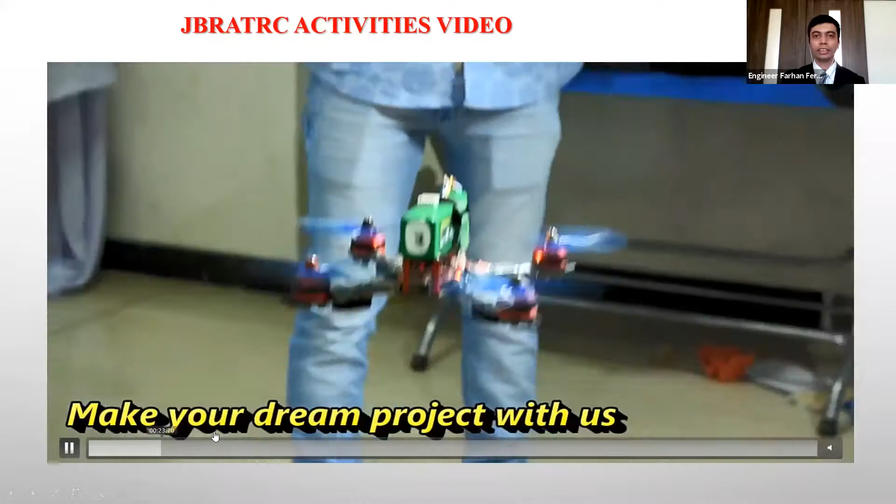So I am showing a video about our organization's activities in Bangladesh and other countries. Last year we organized a drone training session at East West University, Dhaka, Bangladesh. Many students joined, and our trainer trained them. International media, Voice of America, also covered our news, and Bangla newspapers and television media also telecast our workshop and seminar on robotics and other advanced technology.

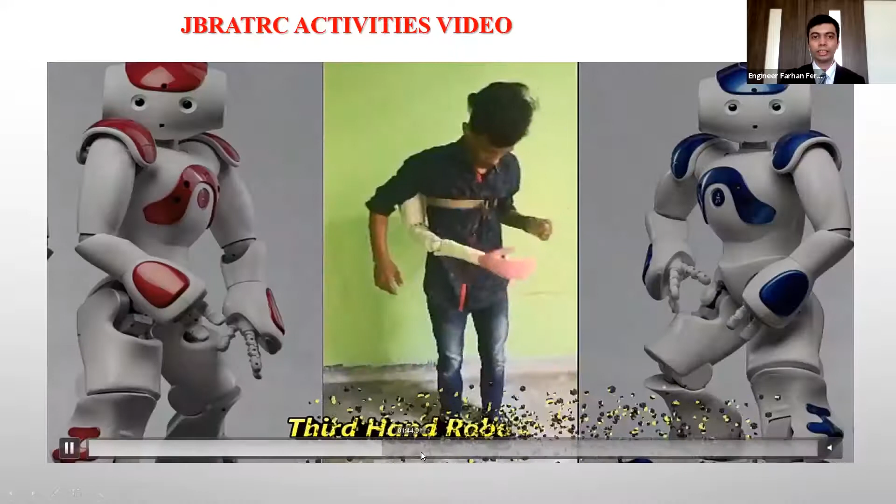Our team members made this robotic hand, which can do work that is difficult for humans, work in dangerous situations, and handle fire objects. Our team also made this prototype cleaning robot. It can clean our home, and it is very important nowadays because the coronavirus is everywhere, so we must keep our home, office and other places clean.

Our team is also doing research on drones: how we can use drones in disaster areas like floods or fires. If any student, professor or anyone wants to join our organization, they can contact us on our website www.jbratrc.com. We also joined some international conferences in Bangladesh.

This one is Bangladesh ICCIT, and our member made this robot, the Bongo robot. This robot can talk with you and answer any type of question. This is the smart window with an IoT system, so it can automatically open and close with the weather. We published this in IEEE and joined an international conference in the USA last year. This machine is an automatic bottle deposit system: if you give a bottle, it returns some money. It is a very environmentally friendly machine.

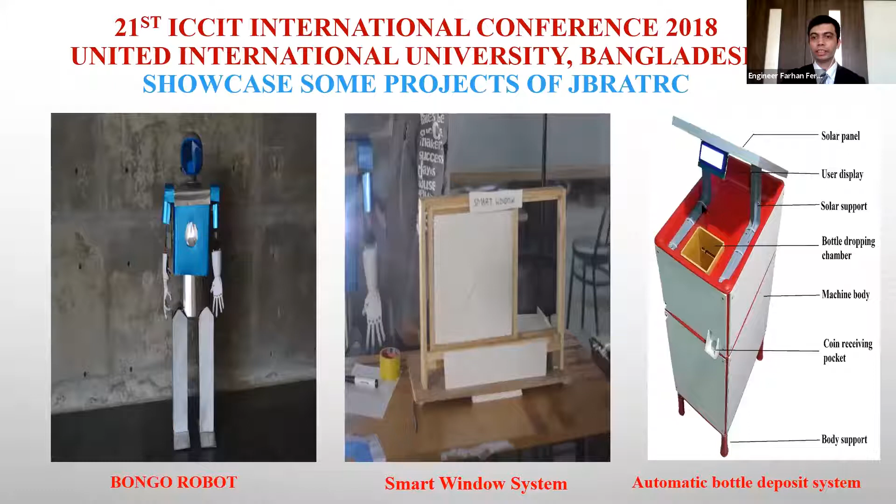We are doing other projects like the firefighting robot, which can protect against fire, and also a smart lock system. We don't need any key; we can use our mobile phone or a remote to open the lock.

And also, as I already told, we are doing some research on drones on the agriculture side, and also the firefighting drone. We are doing research on how we can use it and how we can apply it in the real world.

And last year, our team members and I joined an international conference in the USA, at Eastern Washington University. And I presented a paper on the passive dynamic biped robot, the humanoid robot, with mathematical and simulation results. And our team showed a poster about the Bongo robot.

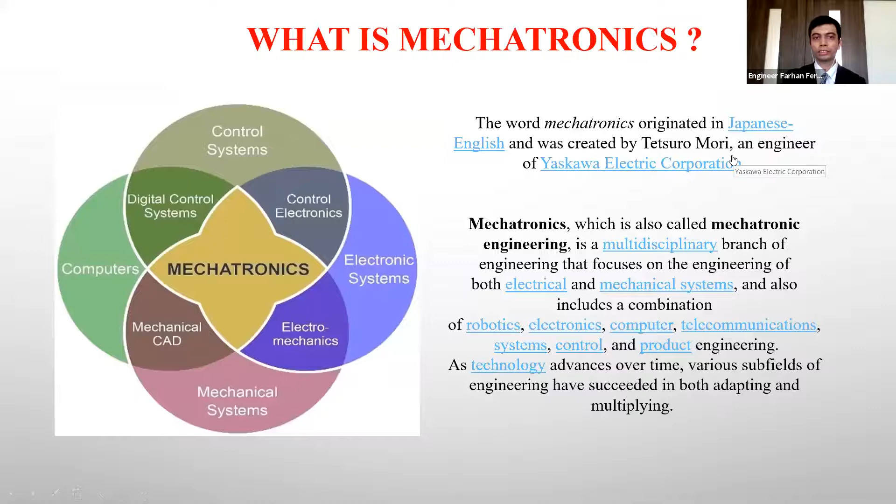Then what is a robot? As I already told, a robot is not one thing. It needs a combination of things. Information science, computer science, mechanical, electrical, electronics, every engineering is needed to make a robot. If you want to design, you need design and construction. And if you want to give artificial intelligence to robots, you must know about software. So there are many areas of application and research in robotics.

There are military purposes; nowadays Boston Dynamics in the USA is trying to make military robots they are testing. And there are industrial robots in Japan. I am working a job with industrial robotics machines, so every day I stay 10 to 12 hours working with this robot.

And agriculture robots; I already told my team also made an agriculture robot. This robot can help agriculture; it can give water to the field and other types of help. Also medical robots, because nowadays coronavirus is a dangerous situation in the world, so medical robots are very important.

This robot can help move medicine from one place to another, and also move your food from one place to another, so people are not infected. Many people can avoid infection, because nowadays if you are very close and mix nearby, it is dangerous for coronavirus. So medical robots are very important.

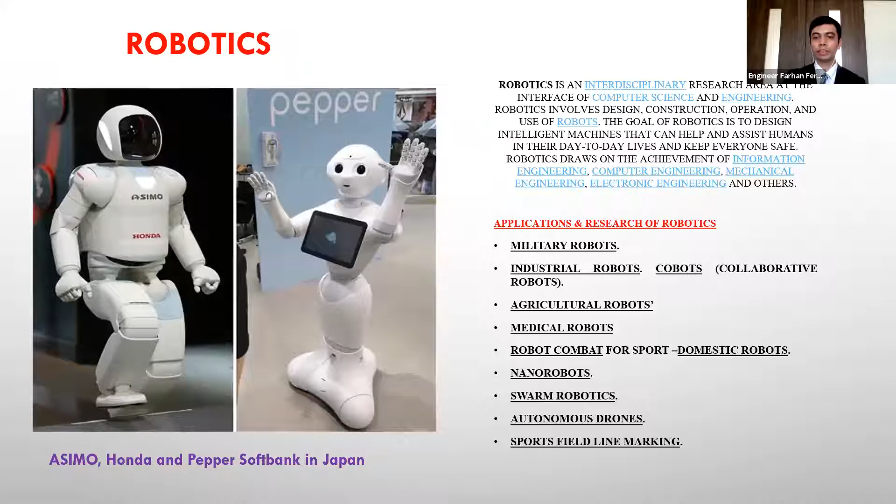So this type of robot can assemble the car. In Japan, there is Panasonic, Toyota, Honda, big companies. They are using the welding robot or assembly robot, and this robot can assemble the car. It is very time effective, and the robot can smoothly do this work, because if you use a human, the human cannot do the work very smoothly, but the robot can do it smoothly, and it takes the lowest time.

So there are some material handling robots, also industrial robots. Some robots can do inspection. If you have any type of defect, then this robot can find it and solve it, improving the productivity. I already told you, if you apply the robot, then it takes less time, and it gives high productivity.

We can do high quality material, because in Japan they use robots, and they get high quality products. Their products are not cheap, they are very expensive, because they use robots in their industry for high-end products.

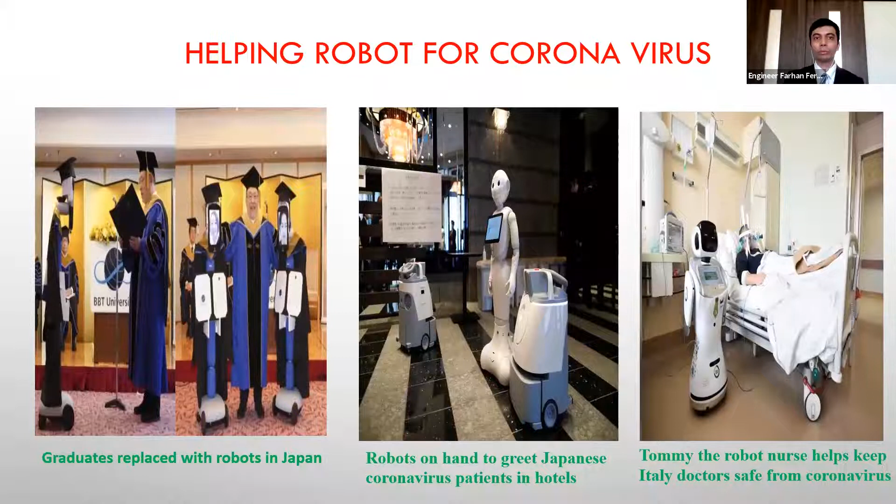And there are some robotics fundamental components. Without knowledge about these components, we cannot know how to make a robot, and how we can research about it.

We must know about actuators, because every robot has an actuator, like servo motors, stepper motors, hydraulic cylinders, and pneumatic cylinders. There's also knowledge about sensors, because we must use sensors in the robot. There are many types of sensors to communicate with the robot internally, such as ultrasonic sensors, some force sensors, touch sensors, and temperature sensors. We can use these in the robot.

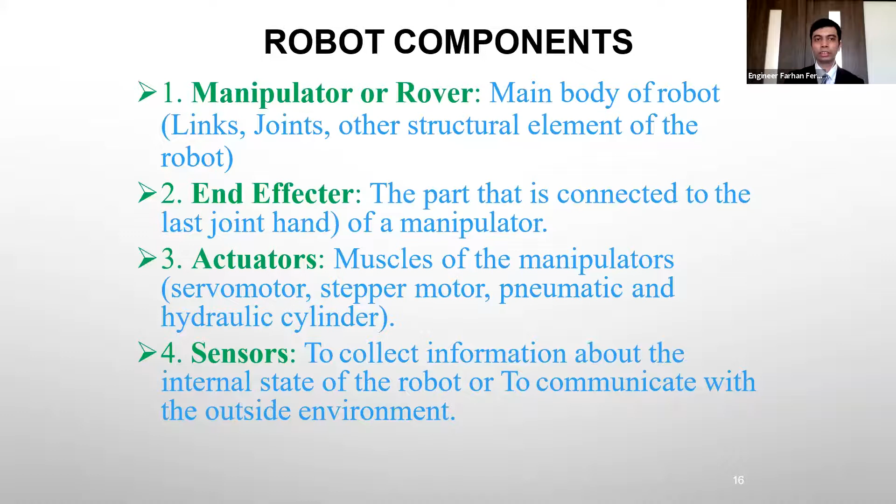There is also need to learn about the controller. We must learn how we can control the robot, how we can control the actuator, and how we can control the robotic leg or other types of robots.

The processor is one type of brain of the robot, because without the processor, the robot cannot calculate the motion, the velocity, and how much distance it can cover. So the processor is very important for a robot, because it is the brain of the robot.

The last one is software. We must learn about software, because without software we cannot do programming for a robot. There are many programming languages in the world, but the fundamental ones are Python, Java, Ruby, C, and C++. We need to learn this type of programming and how to apply it in robotics. We can see examples on Google or YouTube or other places, and then we can learn about it.

Artificial intelligence, AI, is very important for a robot. Without artificial intelligence, if you tell a robot 'please bring me tea,' but the robot doesn't understand, it cannot bring tea or coffee for you. If you tell it to bring medicine or food, but the robot cannot understand, then it cannot bring it for you. So if you program it with artificial intelligence, the robot can understand.

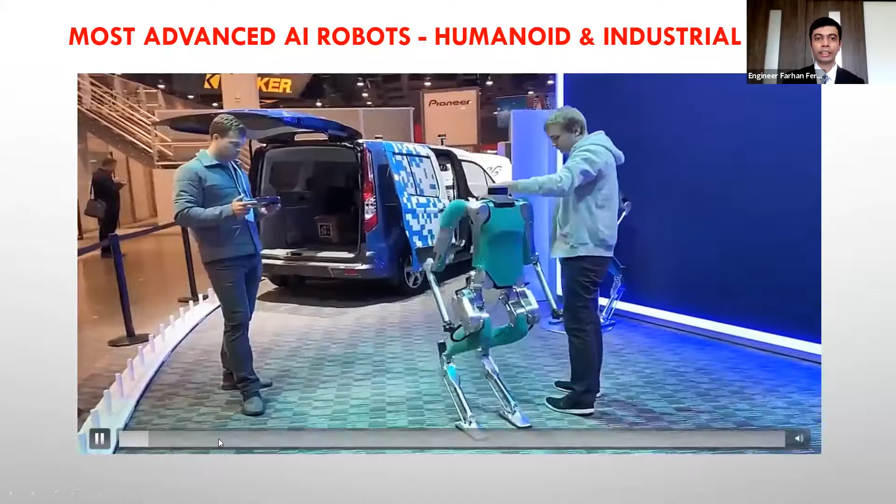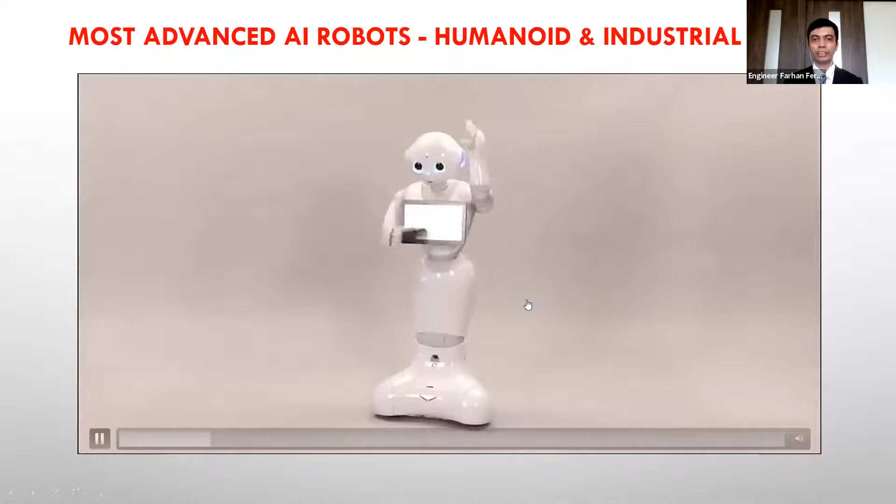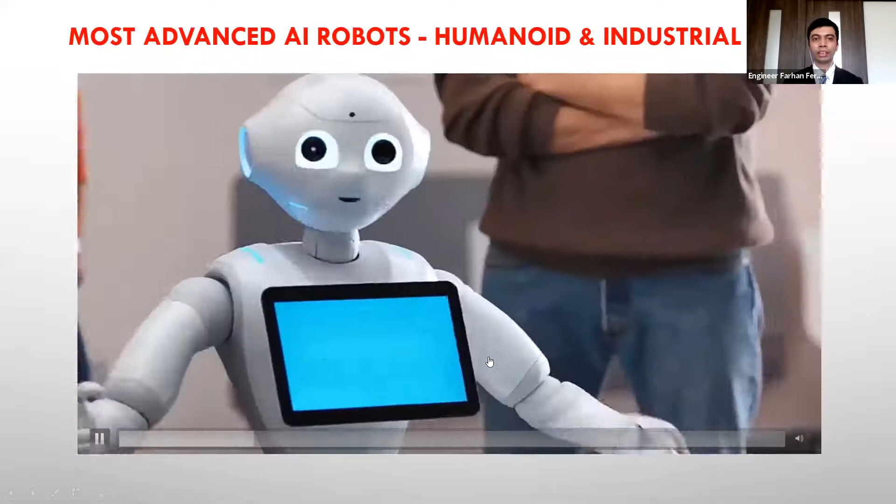This robot can dance and also give you directions in this coronavirus situation, showing where you can go and where a shop is located. Some robots can give you ice cream, and this type in Munich, Germany, they showed the Japanese robot, which already sold about 10,000 units.

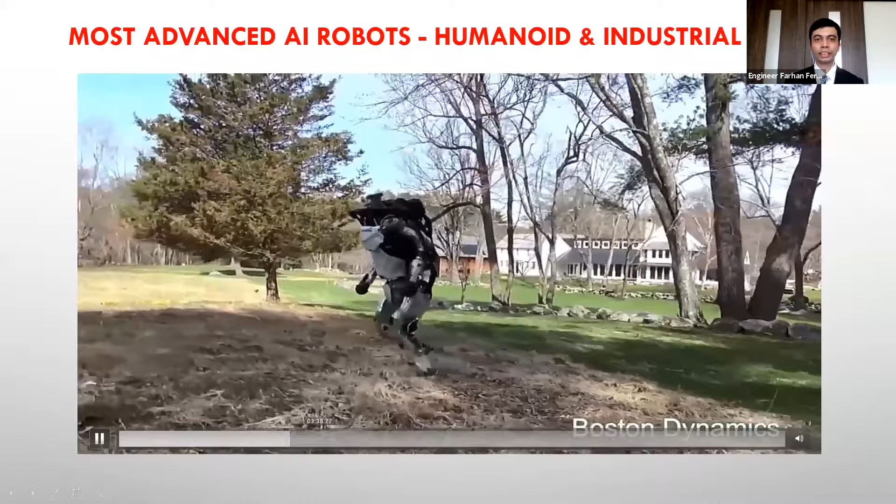And this robot can give you entertainment. This one is the Boston Dynamics USA robot, and this robot can be used for military purposes. They are testing this robot. It is very intelligent and very strong.

This robot is also a Boston Dynamics robot in the USA. They use cameras in the front of the robot, and the robot can go from one place to another without human help.

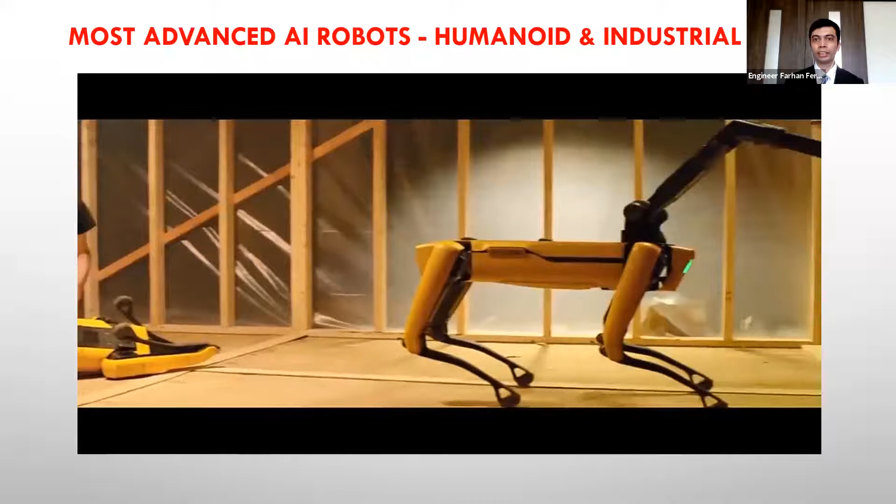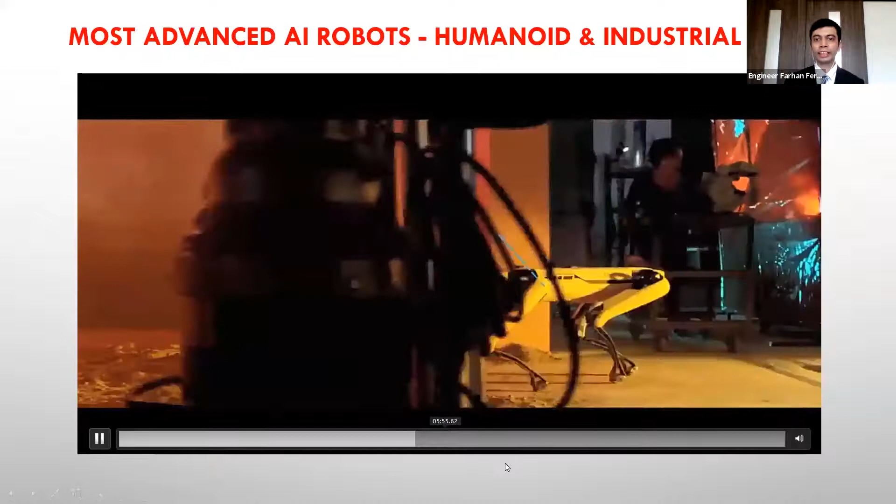Some robots can do dangerous work like drilling, grinding, or nailing, this type of mechanical work done by this robot.

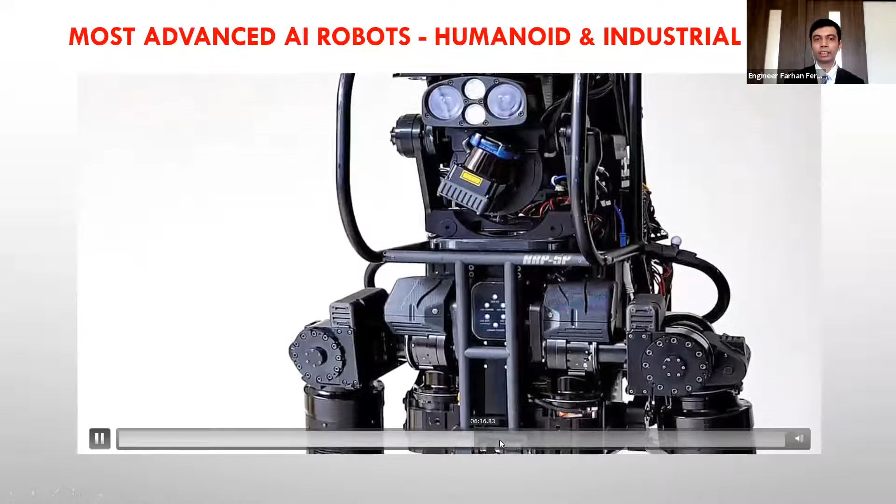This one also made by Japan. And this one, also the eyes, this is also in Japan, or some Korean robot here.

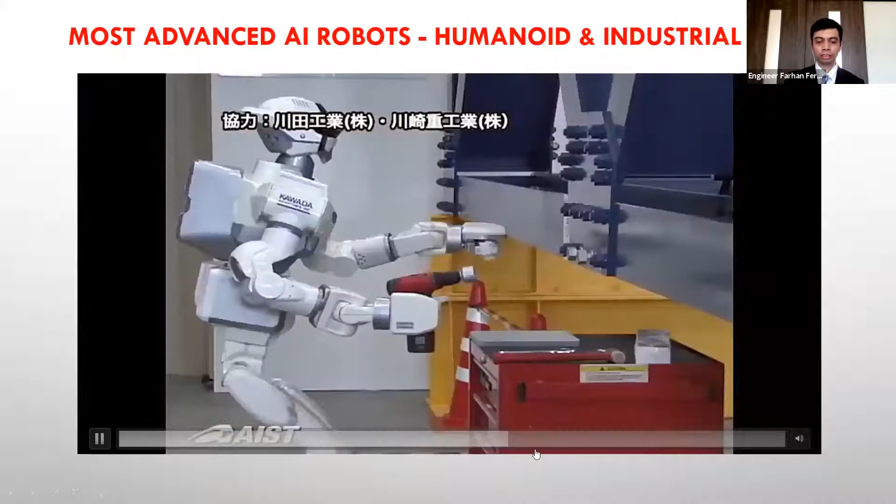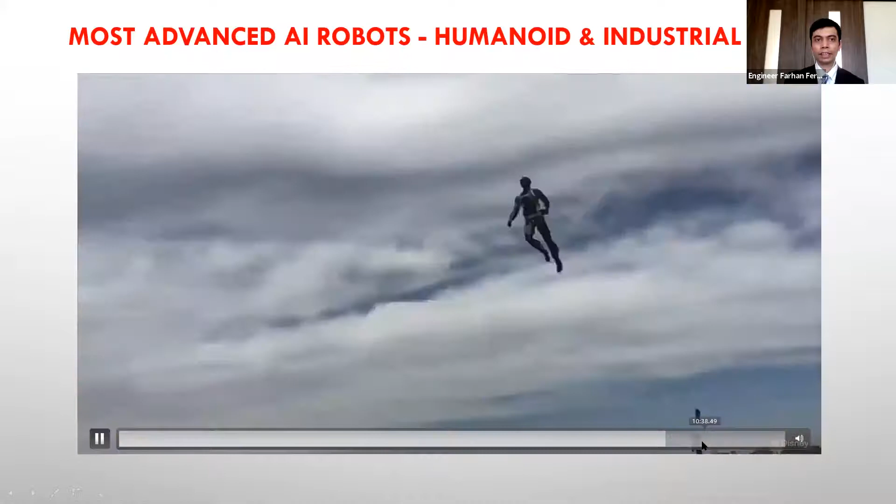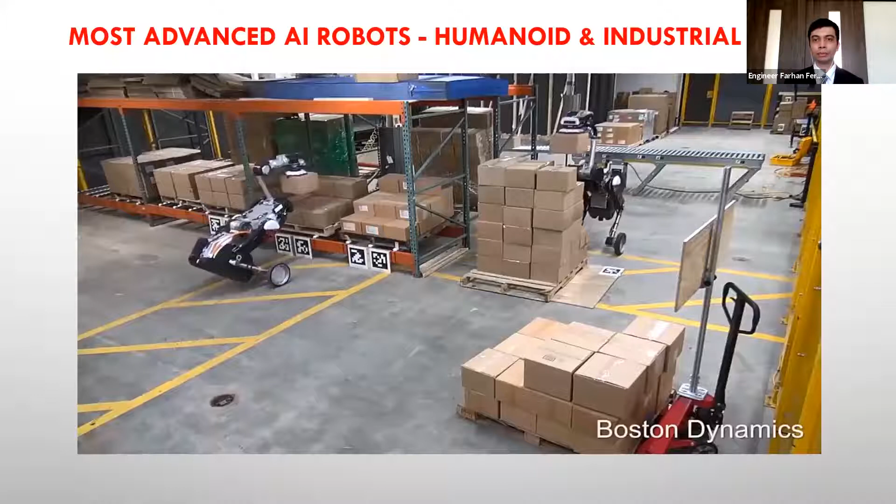This robot helps move things from one place to another, and this type of robot is used nowadays in the Amazon company. This robot can help, and they have wheels on the legs.

This robot can take heavy materials or heavy objects from one place to another very easily. This is also the Boston Dynamics robot in the USA, and they are testing it.

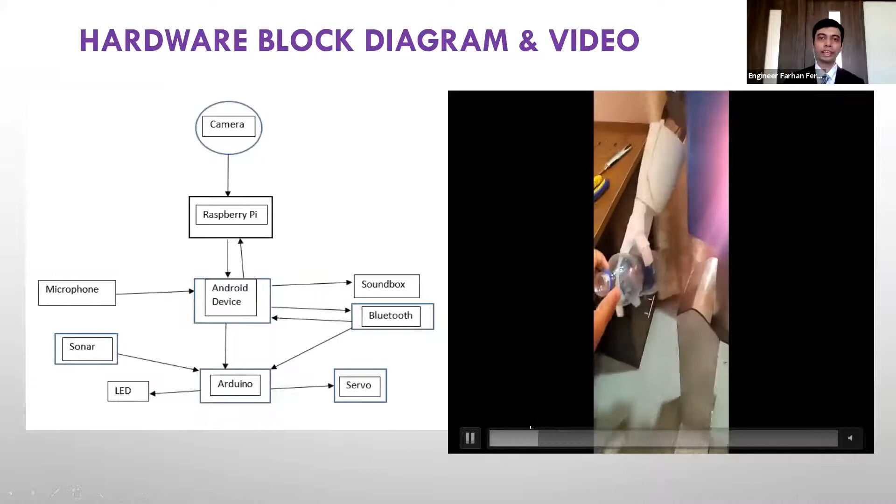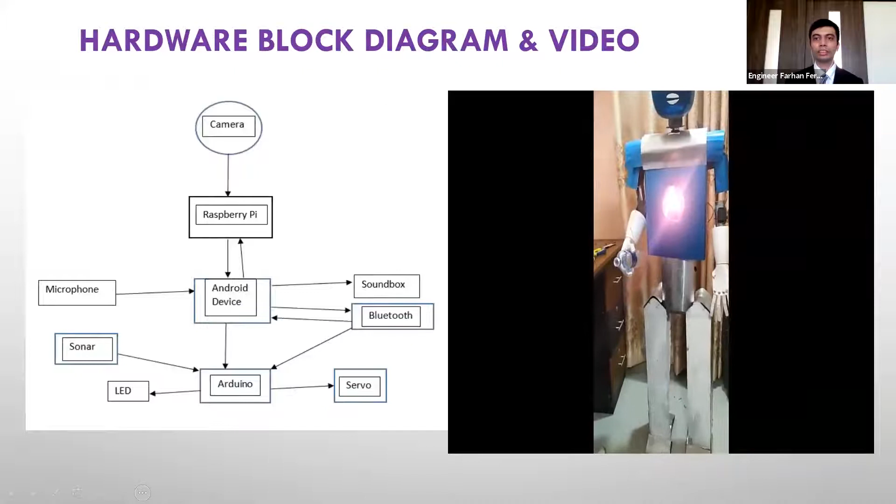There is a video showing this robot. This robot can talk in Bangla, but we are trying to do English. If you ask any type of question or tell it to take the bottle, the robot can take the bottle. If you tell it to hold out the bottle, this robot can hold out the bottle. So this robot can act on your voice direction.

This robot is one kind of artificial intelligence robot, and our team made this robot using a camera, Raspberry Pi, microphone, Android device, sound box, Bluetooth, servo motor, and some light emitting diodes (LEDs).

Our team also made a robot whose name is the education robot. We are using this type of robot for our education purpose, so children can learn from this robot some characters, some ABCs, or some calculations. This robot can do calculations, play with the children, and dance.

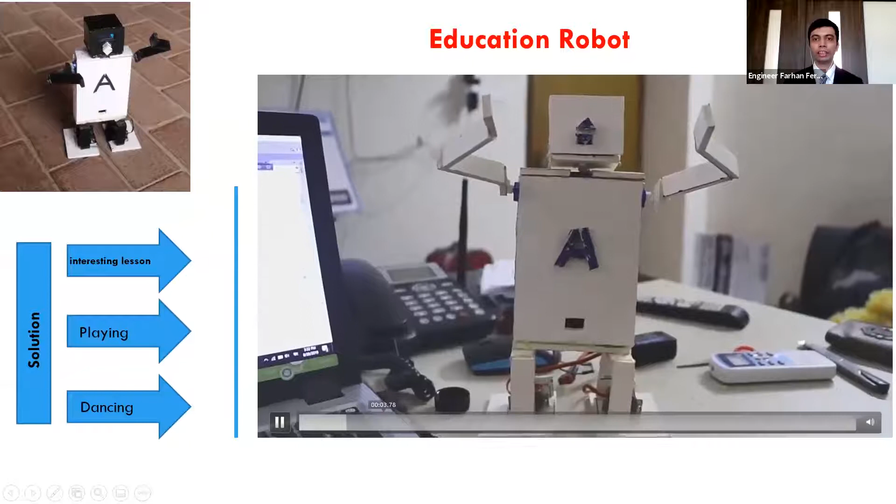Some interesting lessons we are showing in the video. This one is in Bangla now, but we are trying to make it English. So if you tell it some character like ABC or something, the robot can do it.

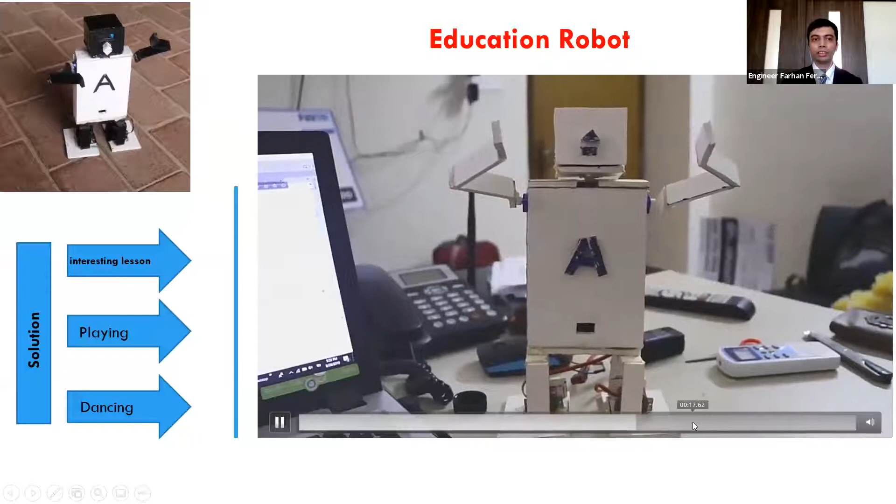If you tell this robot to tell a poem or tell a story, it can talk in the Bangla language now. If you tell it some general calculation, like summation, minus, or plus, this type of robot can do it. It can also dance, sing a song.

They also use Wi-Fi without needing to be online, but this one is an online robot. So it can move its head, move its hand, and the robot can dance if you tell it to.

And now I am telling about a very harsh subject in robotics: robotics dynamics. I have some research in this, from my master's degree in robotics dynamics.

Robotics dynamics is a kind of dynamics. This tells the acceleration, and also tells how we can calculate the robot and how we can simulate the robot. So we must know about mathematics, physics, and dynamics. We must learn about it before we calculate it.

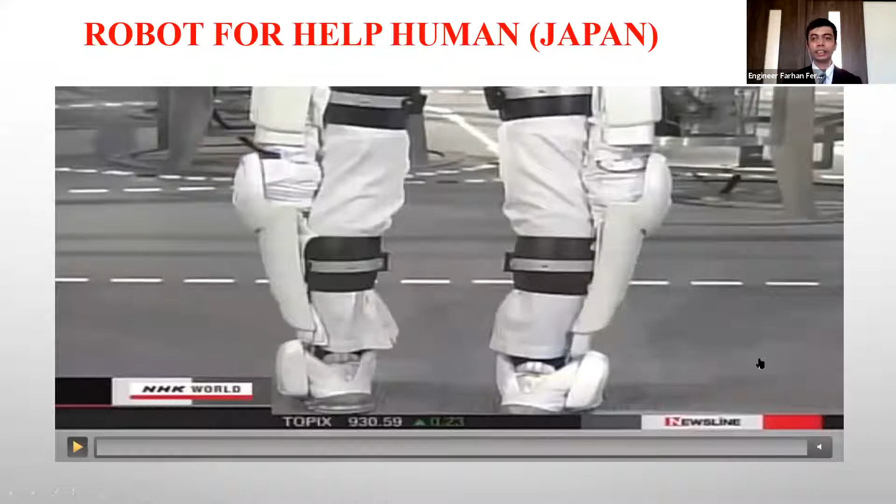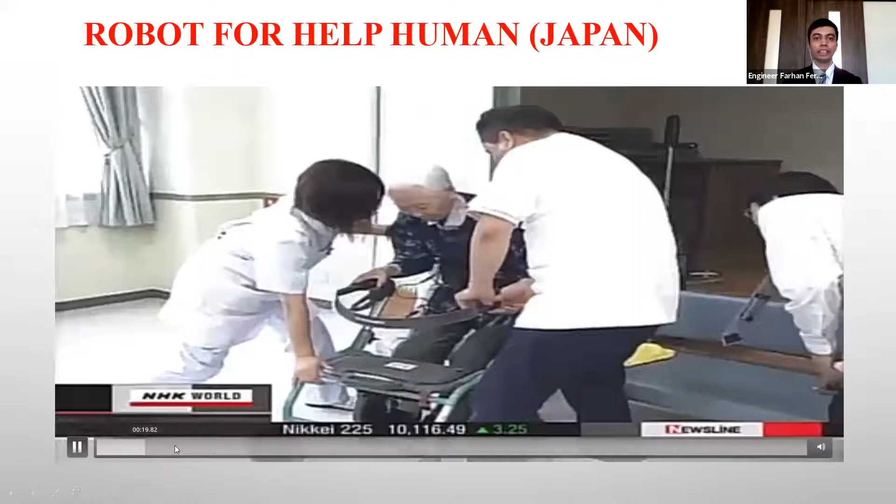Now I am showing a video, because nowadays in Japan there are many old people, so this type of helping robot is very important, a healthcare robot. Because many people here are old, this type of robot can help people move from one place to another without the help of humans.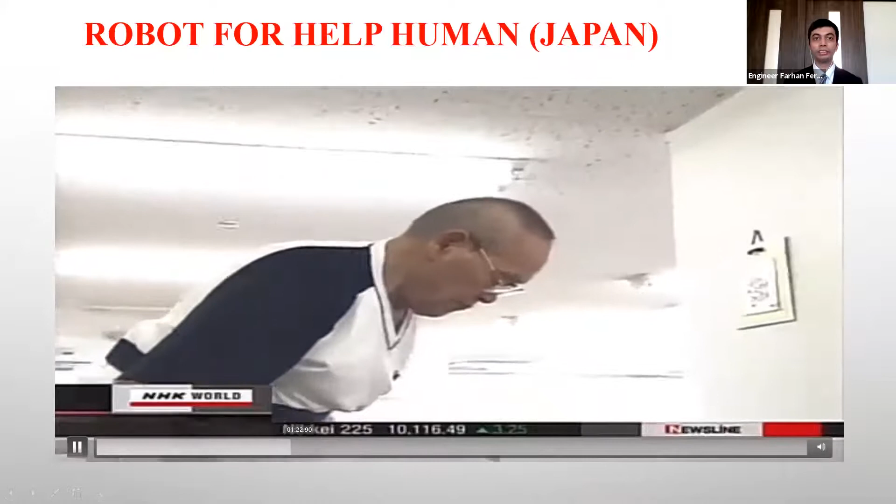Some company made this type of helping robot for old people, so they can go from one place to another without the help of any human, and this robot can help. This is a type of robotic limb, robotic device, or wheelchair robot.

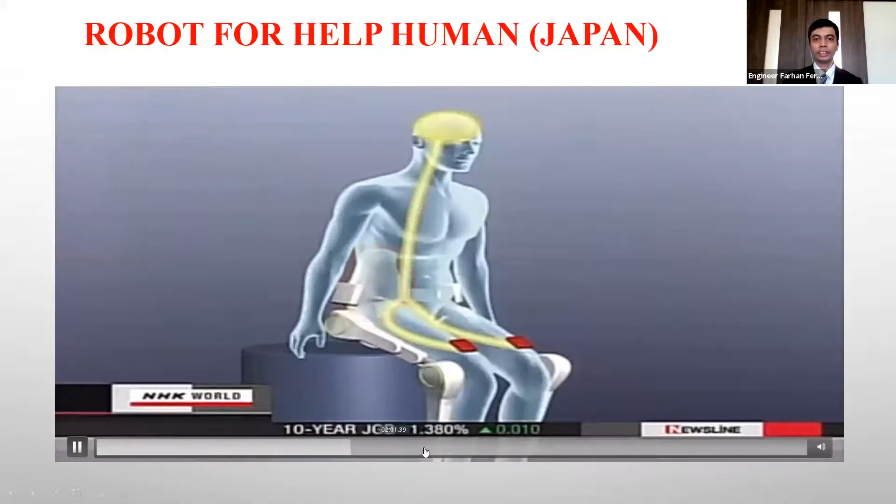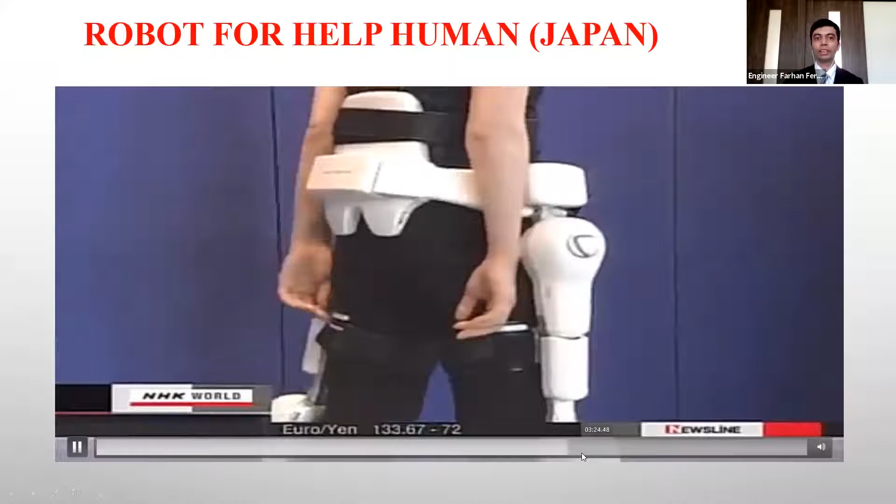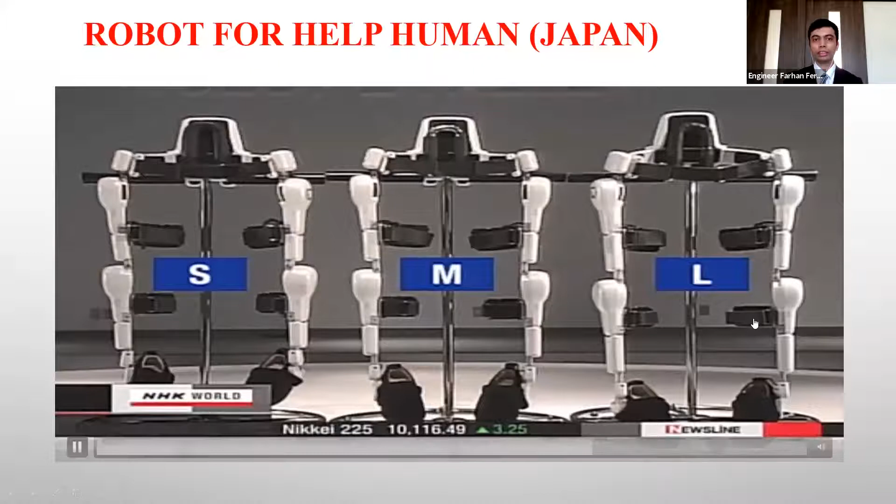They are testing some devices, and Cyberdyne, this company, produces this type of robotics product. This robot can help move from one place to another. Many types of this company Cyberdyne, they made this type of robot.

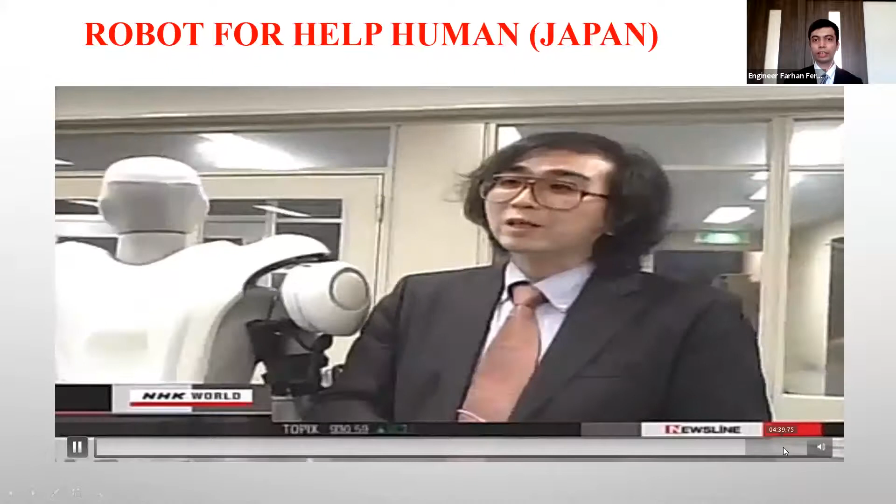So he is the CEO of this company. He made this type of helping robot, this wheelchair or helping robot, to help an old person in the hospital.

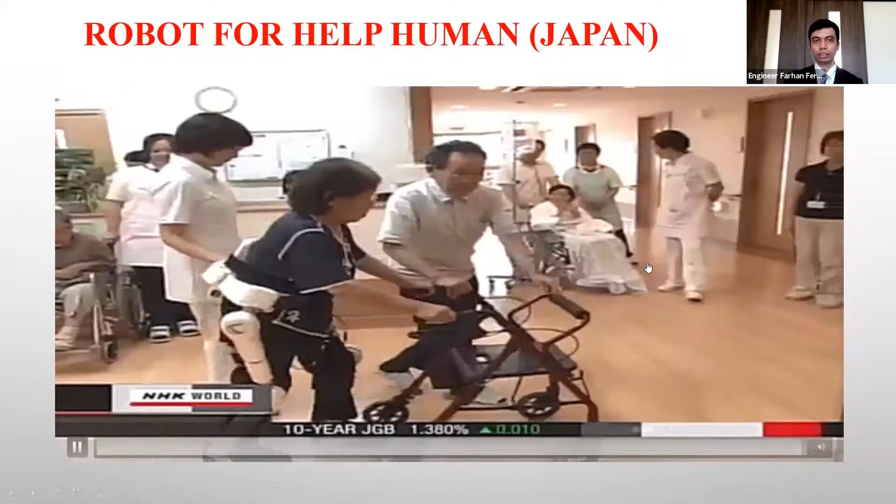Now I am moving again to robotics dynamics. This is critical. We use some mathematical simulation software here to produce the dynamics, mathematical and simulation results.

This was my master's research, and I have also done some artificial intelligence research in my master's. This one is the four-DOF model, and I already told about DOF, degree of freedom. Four DOF means X, Z, theta 1, and theta 2.

This is the forward dynamics model, and it is passive because we did not use any motor in this robot. This robot can only work on a gentle slope, at some angle. So this is the point X and Z, two points, and there are two angles, theta 1 and theta 2.

There is the angle between the two legs, which is alpha, the hip angle, and the angle of the two legs is the same. This leg is named the swing leg, and this one the stance leg. This leg is the swing leg because it is off the floor.

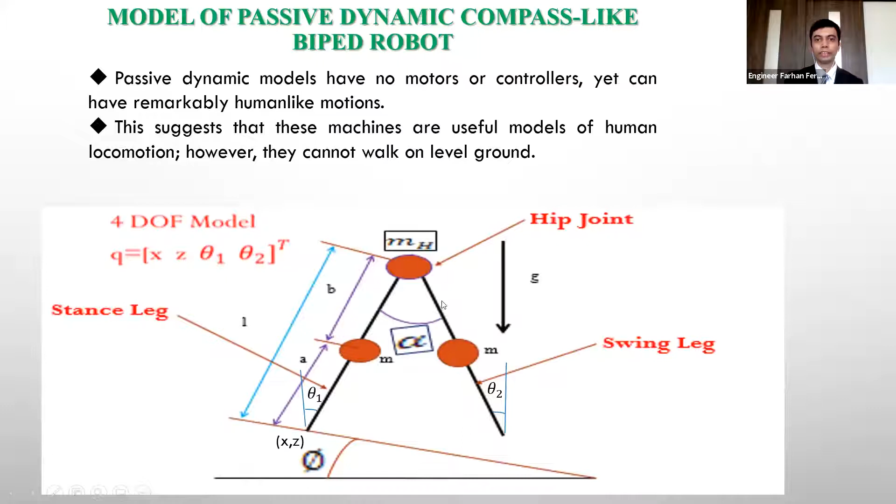We are using some parameters in this robot, and we calculate some equations of motion using Newton's second law and the Lagrangian equation of motion. This type of equation, this mathematics, includes the velocity product and gravity term.

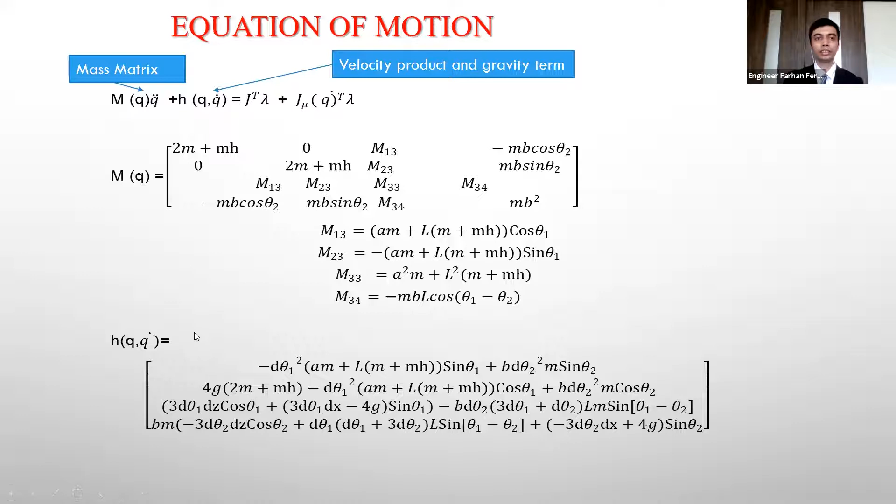And I am showing a simulation I developed. This is the stable robot, without a motor, passive. It can only work on sloped ground, with some angle, so it can move without falling down. It can work on a gentle slope.

This robot is from Nagoya Tech, 2005. This robot is a record robot, with 4,000 steps in about 35 minutes.

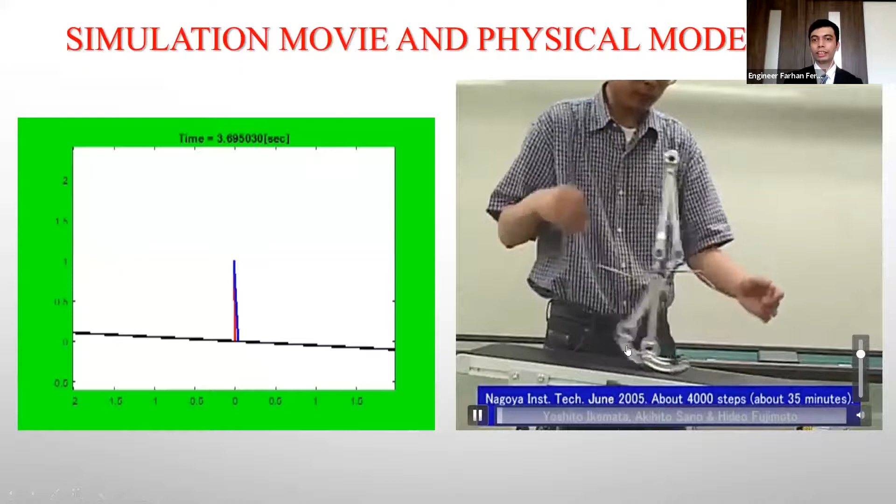So I am showing this video. This one is also passive, there is no motor, only the gentle slope, and it can work, about 4,000 steps in about 35 minutes.

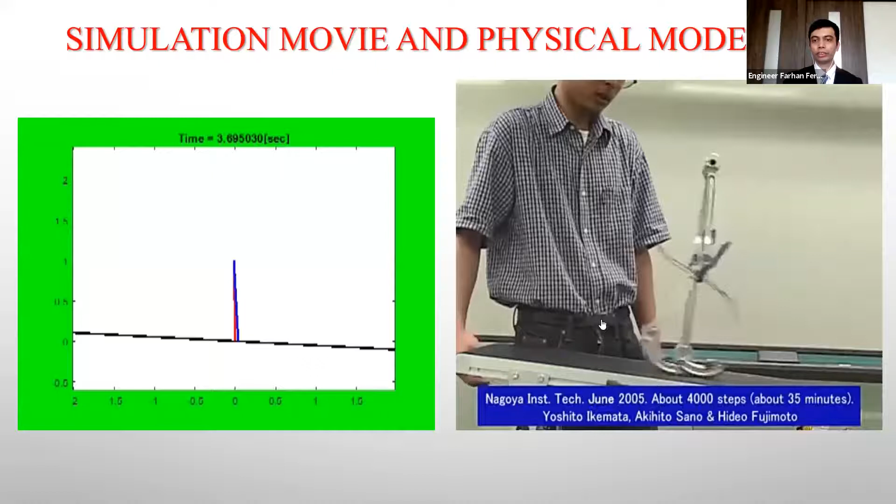Nagoya Tech in Japan made this robot. It's a passive dynamic robot, there is no motor. After about 35 minutes it falls down. They designed this robot.

Last year I presented on the passive motion of a biped robot with unbalanced masses in the USA, at Eastern Washington University and Washington State University.

We have an international IEEE paper in the IEEE library. In this paper, you can see the details. Our three members went to the USA last year, and we presented this research on passive dynamic walking. Last time I used two equal masses, but in this case I applied two different masses. These are M1 and M2.

If M1 is 5 kg but M2 is 10 kg, this robot can still walk. I want to apply it for people who have no leg, who have lost a leg in an accident. So we can apply this type of robot. If your real leg is 5 kg but your artificial leg is 10 kg, the human can walk easily, without falling down. I already proved this in the mathematical simulation results and presented it in the USA last year.

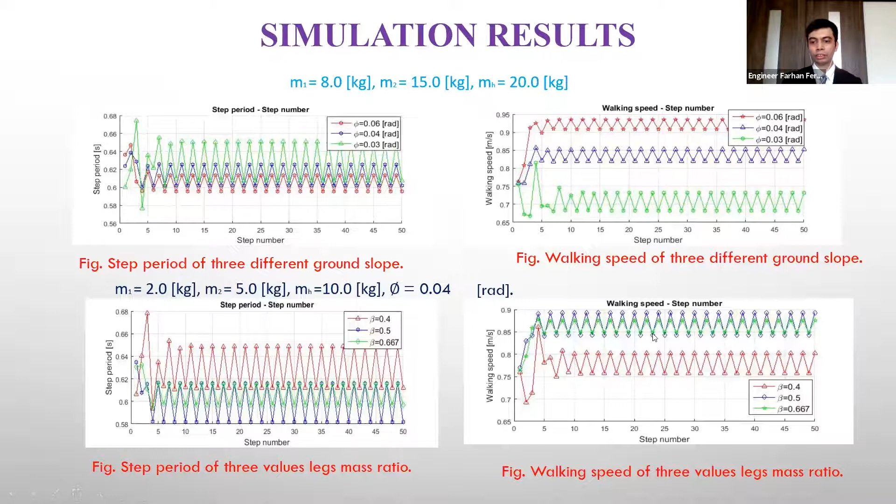And this is another paper, also published by IEEE New York; you can get it in the IEEE library. The title is "Stable Walking of an Underactuated Bipedal Robot with Unbalanced Masses Using One Actuator." An actuator is needed for every robot, but using only one actuator is challenging. This robot can walk on level ground or slope ground.

Underactuated relates to degrees of freedom. There are 5 degrees of freedom: these 2, plus theta 1, theta 2, and theta 3, but we only use one motor or actuator. So this is called an underactuated robot. We only use one control input. This U means the torque of the motor. So we only use one motor, and we use some parameters for this robot.

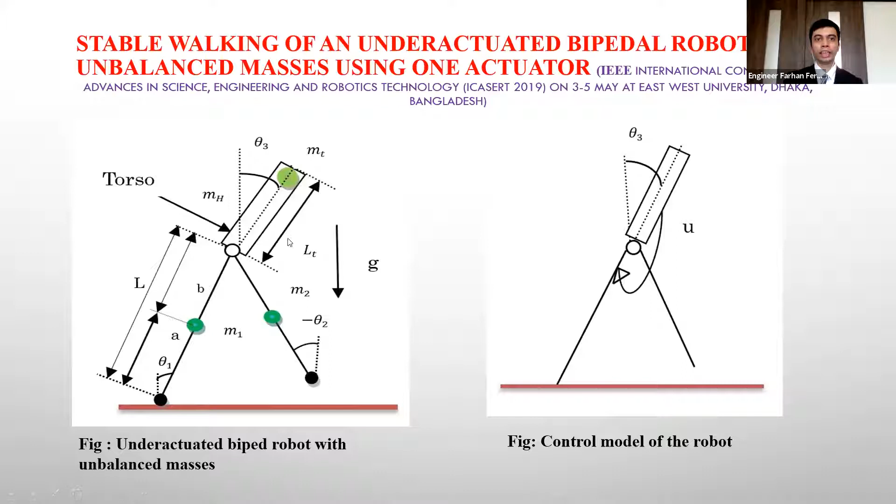This is the leg length, and the length of the torso is 0.8. This one is the length LT, and this is alpha, the angle between the two legs, and this is the gravity constant G, 9.8. M1, M2, MH, and MT is the torso mass. And KP and KD, 409 and 20, we use for the PD controller.

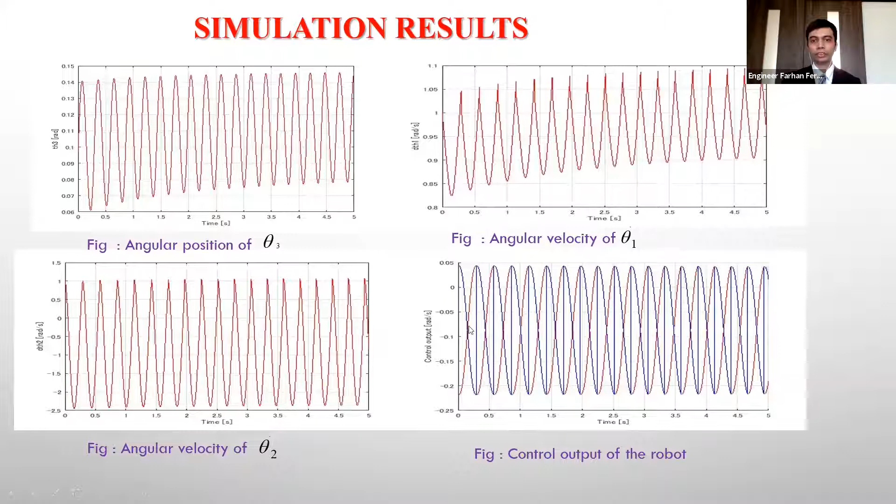But in the angular velocity, after differentiating, this one is not the same level, but theta 2 is the same level angular position velocity of the swing leg angle, and this is the control output. Compared with the time, we can see the control output is also stable.

And there are some industrial robots in Japan. They are using them, and in 2005 there were 43.9 thousand units of robots in use in Japan. This is the highest, and this is the lowest, in 2009. And in 2016 they are using almost 38.6 thousand units of robots in Japan. I know because I am doing a job in a company in Japan in a robotics unit.

So most companies, from small and medium companies to the largest companies, are using robots in their factories, because the robot can give you a high level of product, and it can save time to produce your item. So it is very important. And some Japanese companies, Denso, Fanuc, Hitachi, Kawasaki, Mitsubishi Electric, Panasonic, Sony, Toshiba, Yamaha, Yaskawa Electric, are making industrial robots for industry.

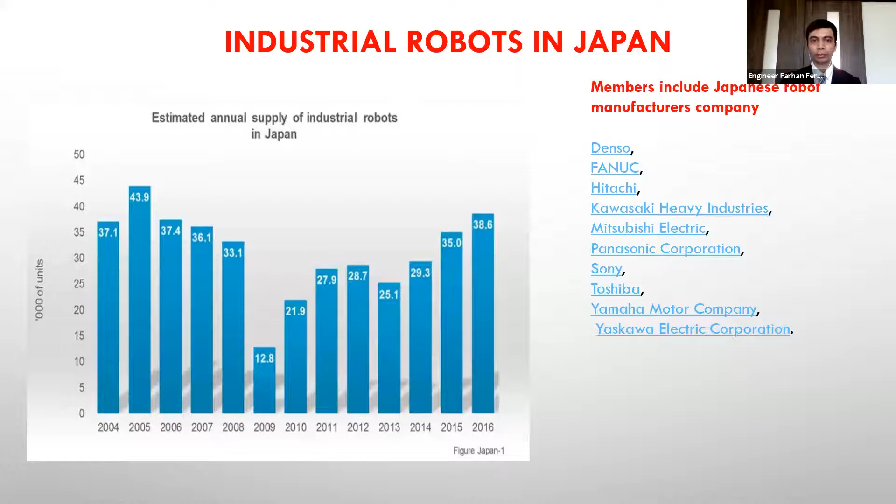And this is innovation. I am showing a video of how they use robots in their factory, in their working place. So the robot can use some visual camera, or some robotic hand to take an object from one place to another place. Also the time and cost spent: this is the starting point and this is the goal point.

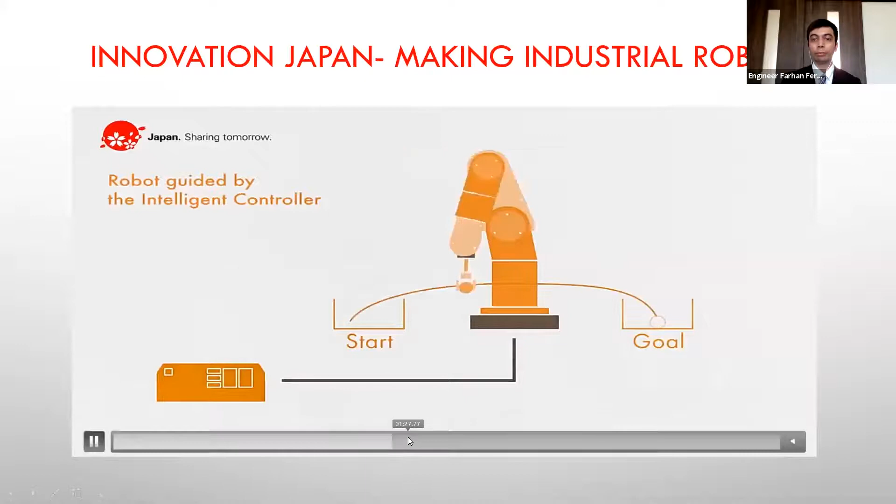So this type of robot can take an item from one place to another in a very short time, but if a human does it in this area or this size, it takes much time. But this robot can do it in the lowest time. And they can give very high production, and they can arrange objects and products very well, without any mistake.

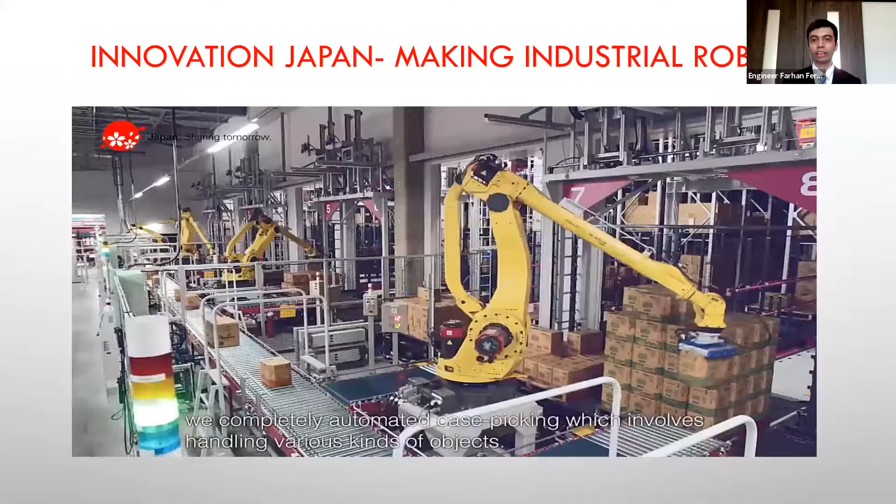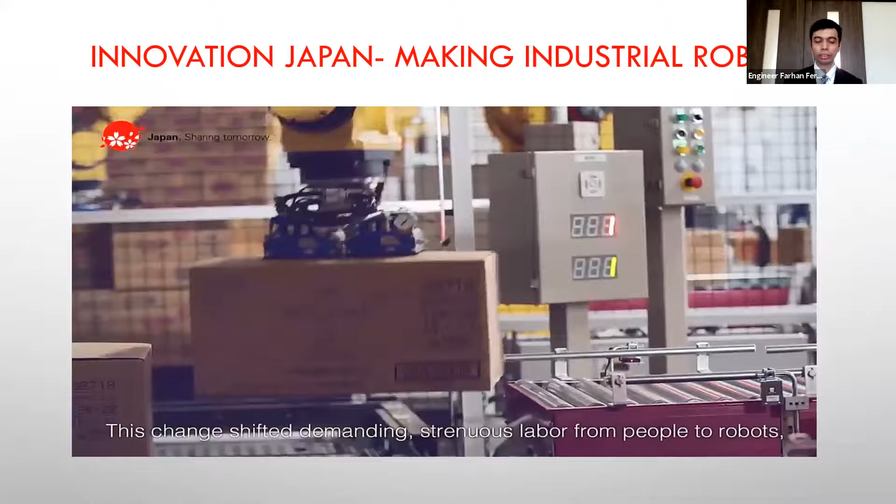So they are using robots in many companies in Japan, and the human is needed here to control the robot and show how to arrange the robot, how the robot can work. So if you have an efficient worker, then you can control a robot. Without an efficient worker, you cannot control a robot, because skill is very important to control a robot. If you make a mistake, this robot can fall down and break, because this type of robot is very costly.

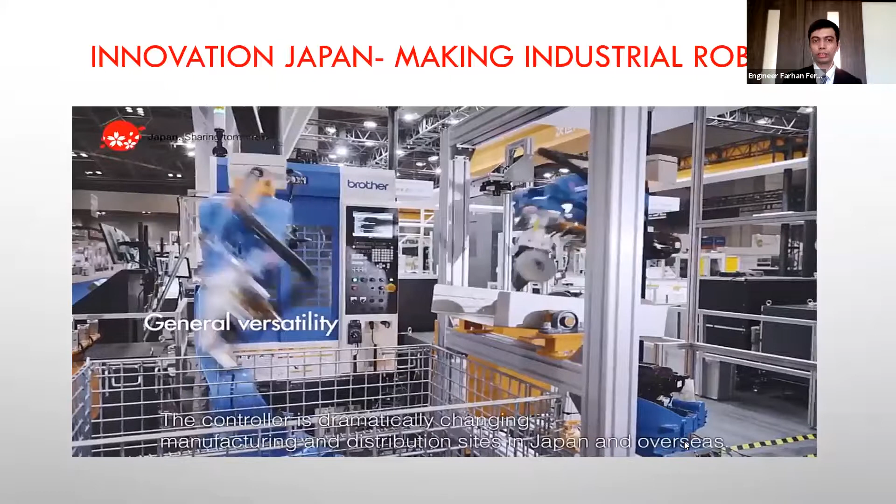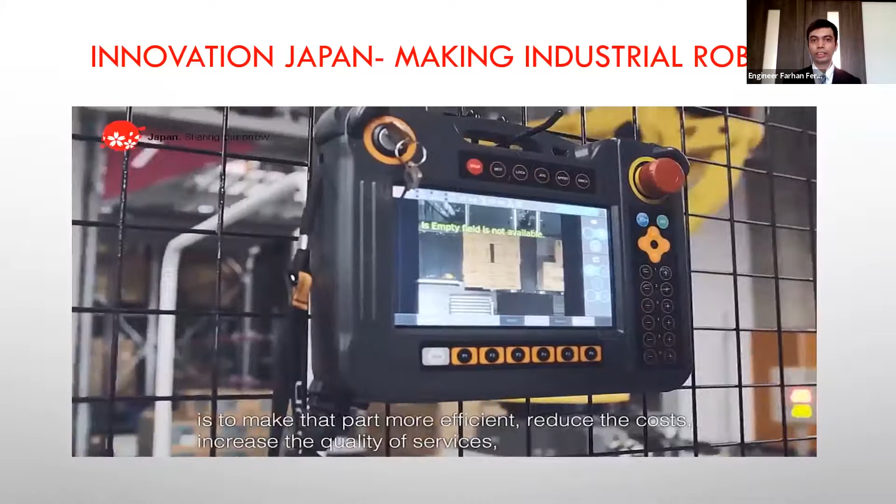And many companies are using robots in Japan, and in other countries like Germany, Korea, also the USA and Canada, they are using robots in their factories, in their industry, to produce their items.

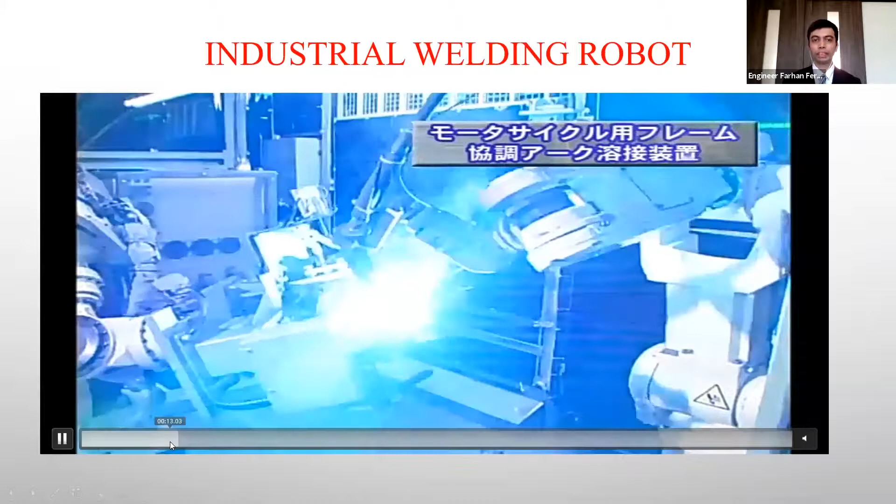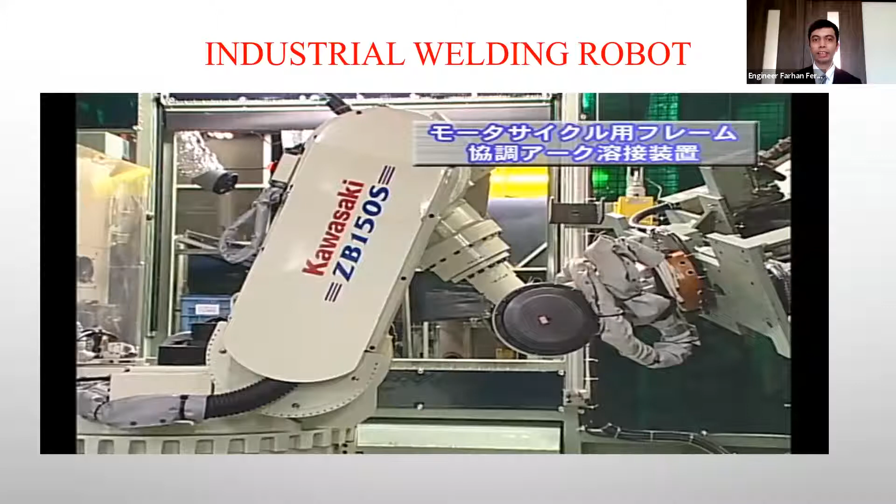So this is the industrial welding robot. I am doing work with this robot. This robot can join machine parts. They can work in an environment that is a very dangerous situation. The robot can do welding, some type of joining, making parts of the machine, some type of complete machine. This robot can do it automatically. If you set up the mechanical setup and control, then this robot can do it automatically.

This one is from the Kawasaki company. This type of welding robot is used in industry in Japan and some other high-tech countries. And this robot works automatically. It's already a programmable robot, and if you set up all things in the mechanical setup, then this robot can automatically do this work.

Now I am starting another part: study in Japan, how students can study from your country or other countries. There is a system in the education system in Japan. First, there is elementary education, which is 6 years, and secondary education is 3 years. After you pass elementary school, you can enter secondary education, which is 3 years, and then upper secondary school, and thereafter you complete your secondary education.

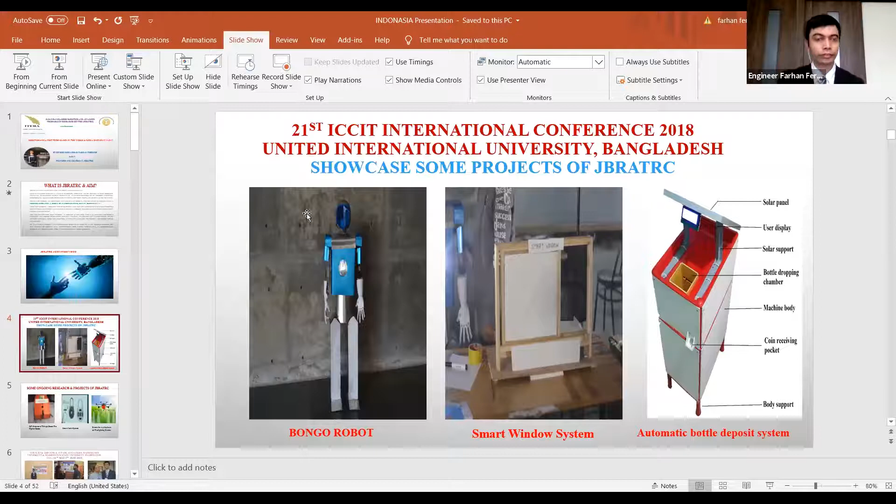In Indonesia, maybe I want to add to the answer that in Indonesia, ITS has built a robot called Raisa. It's from Institut Teknologi Sepuluh Nopember. That robot is used to bring the medicine. So with the robot, the nurse cannot be infected by the coronavirus. Yes. It's minimized. Yes. Okay.

And then the next question is from Farrell from University of Lampung. He asks, can we put this artificial intelligence in UAV technology? Oh, UAV, in the drone technology. So if you want to apply this type of artificial intelligence, because we are doing research on this one, if you have some disaster, if you have a flood or some fire in big buildings, then this type of artificial intelligence robot can go and

fight the fire, or also prevent the fire, or it can take some pictures or some video from the disaster area, the flood area, also tsunami, also heavy rain areas. There are many people who died, or many people who cannot move from one place to another. Then that robot can give information to the humans. So in this type of work we can use artificial intelligence in the drone, in the UAV.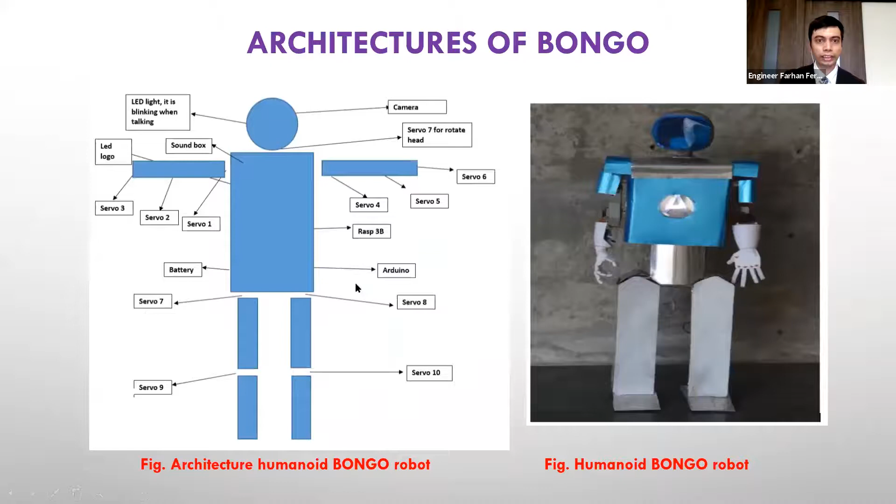Maybe a question: is it possible to add artificial intelligence to microcontrollers such as Arduino or ARM32? Yes, it is possible. Our team developed this type of artificial intelligence robot. We use some motors, some cameras, the Raspberry Pi, and also the Arduino device. So we can also use the microcontroller, giving it the programming for artificial intelligence. If we wish, we can use a Raspberry Pi, an Arduino, or a microcontroller.

In my bachelor degree project, we used the microcontroller PIC16F676 in an automatic car robot. We used it as an artificial intelligent robot. This robot can make decisions. If there is an object in front of the robot, it stops, and if there is no object, it goes. And if there is an obstacle, the robot can take another path or another road. So for this type of artificial intelligence robot, we can also use the microcontroller.

So we should use the Raspberry Pi to put artificial intelligence, because the Raspberry Pi has more speed than the Arduino? Yes. Yes.

Okay. The next question is from Arif from Institut Teknologi Sumatera. What is the most popular programming language currently used in the industry? Python is very popular nowadays. Also, we are using Java for some robots, and C, C++, C#. We are using these languages nowadays, and some other programming languages too. But these are very popular nowadays. If you know these languages, you can get a job easily in any type of company.

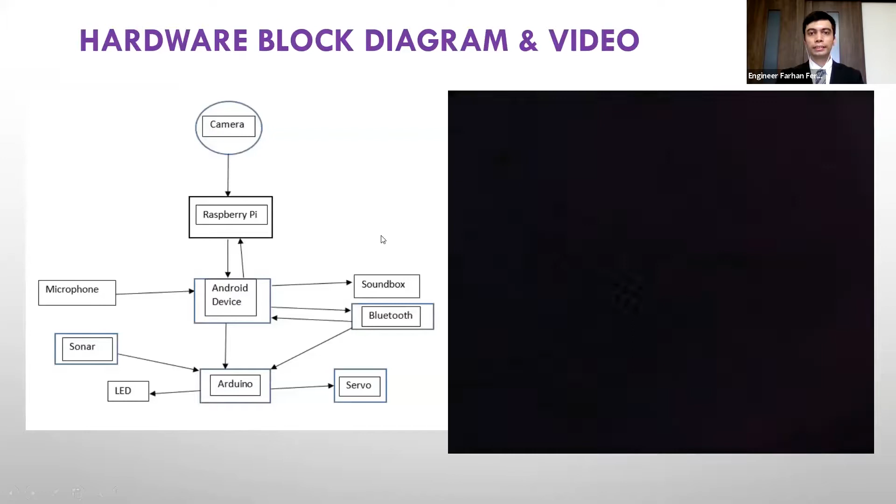Thank you for the questions and answers from the participants. Let me give the conclusion of this webinar: first, the technology of robots is growing rapidly, and many jobs will be taken by robots. What we can do is master the technology, or the technology will master us in many ways.

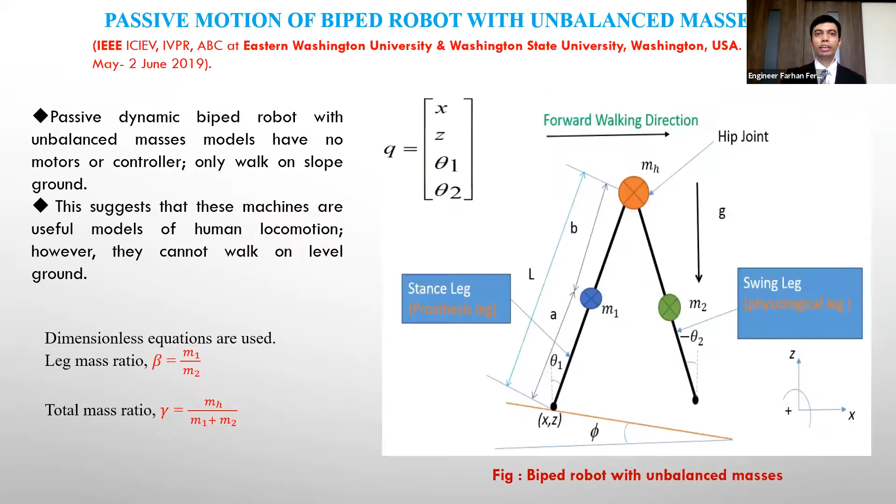Is it right that if you use robots or automatic devices, many people can lose their job? But in Japan, they are using many robots in their medium to big industries, yet there are still many jobs. If you have good skill about robots, IoT, machine learning, artificial intelligence, drones, and this type of latest technology, or know some software, you will get a job easily. But if you have no skill or no efficiency for your work, it is very critical to get a job without higher or special skills. So it is important to achieve higher skill on your own.

There are so many things to study and work on in Japan, and you can start by practicing English. But in Japan, is Japanese language more important than English? Yes, because if you do a part-time job in Japan as a student, you need some Japanese. In my company too, we mostly use Japanese, sometimes a little English, but mostly Japanese for communication, because even if they know English, they will only tell you in Japanese. Japanese people say this is Japan, so you must learn Japanese. Every product here, like AC, microwave, rice cooker, is labeled in Japanese, not English. So it is very essential to learn Japanese if you are living, working, or studying in Japan.